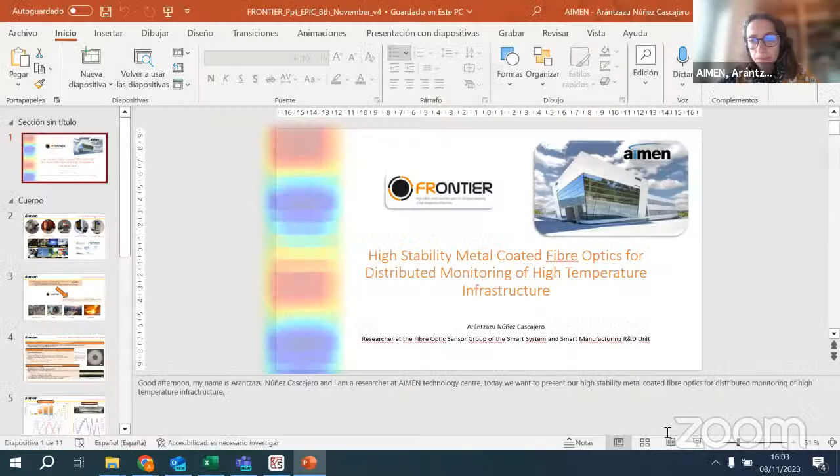I hope now you can see my screen. Yes, okay. Good afternoon. My name is Arántzazu Nuñez Cascajero, and I'm a researcher at the AIMEN Technology Center. Today we want to present our high-stability metal-coated optical fiber optics for distributed monitoring of high-temperature infrastructure.

AIMEN is a private non-profit technology center located in Galicia, in the northwest of Spain. We are specialized in materials and advanced manufacturing processes, working in technological services, offering solutions to clients, and also in research and development projects for different sectors such as metal, mechanics, automotive, aerospace, energy, shipbuilding, and also biofood and textile. Our organization is a member of different European and national associations, and in the last 10 years we have participated in more than 690 research and development projects.

In particular, the solution presented today has been developed by the Fiber Optic Sensor Group of the Smart System and Smart Manufacturing Research and Development Unit. But why does this technology arise?

Because there are many applications where it is necessary to measure strain and temperature simultaneously. For this, fiber optic sensors are a well-known and established technology. Although the fiber optic is made with silica that withstands temperatures up to 1,200 degrees, commercially available fiber optic sensors can only be used for long-term monitoring at temperatures lower than 450 degrees due to the coatings that are used. Also, in harsh environments, their durability decreases drastically.

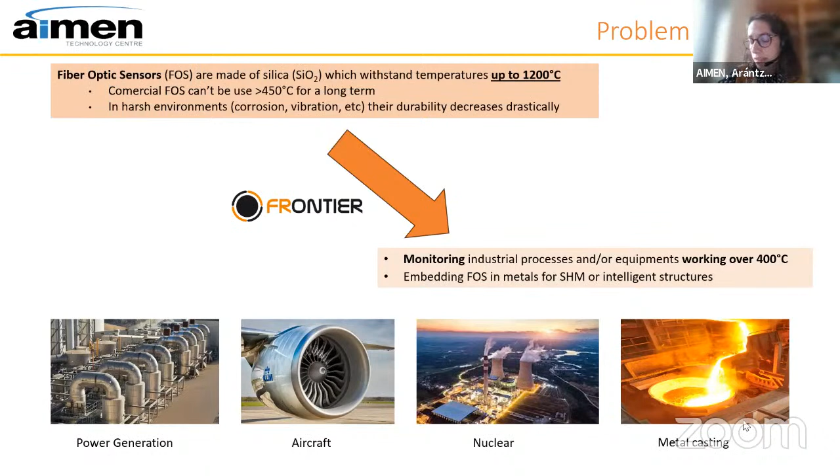So a solution should be found for industrial processes that work at those high temperatures, and also for sensors that don't need to withstand those temperatures themselves, but for which the embedding process requires withstanding very high temperatures due to the melting of the materials. This technology can be used in power generation, aircrafts, nuclear, and also in furnace and pipes of metal casting applications.

Our technology comprises a unique automated and continuous coating system for FBGs and distributed fiber optic sensors. It is a unique technology in the market that is patent pending. The equipment allows the continuous coating of optical fiber with a wide range of coating thicknesses. It has different control and monitoring parameters such as temperature, coating speed, coating quality, and tensile strength, and it's also very versatile because it can be used with other metals when optimized.

As I commented before, it is usable for FBGs and for optical fibers. Regarding the optical fiber that we can achieve and its properties, we can achieve homogeneous custom coatings as the one shown here.

And the fiber that we achieve is very manipulable. They do not easily break or deteriorate.

Also, you can see here other properties. The most interesting ones comprise the thermal performance, having a long-term temperature point of 700 degrees, and for short-term, 1000 degrees. These optical fibers can be embedded by welding, laser, ultrasound, and other techniques. Also, it is important to remark that it is a cost-effective product, being cheaper than other alternatives such as gold or sapphire.

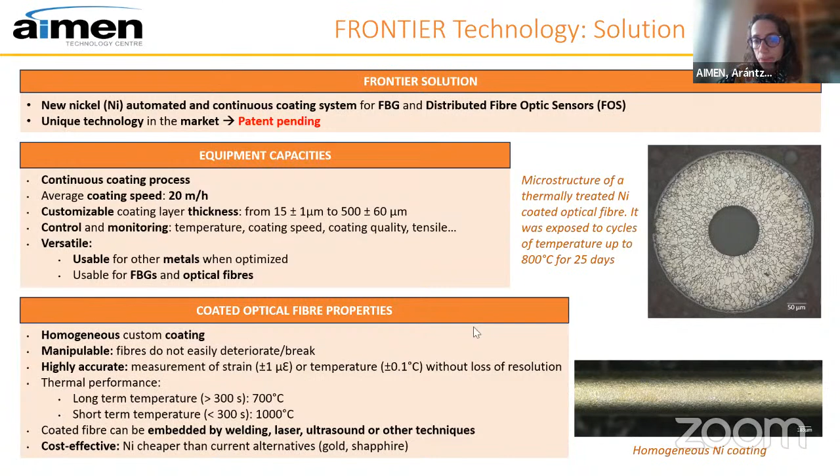The nickel-coated sensors have been thermally tested, and both fibers, distributed fibers and FBGs, show a repeatable and reproducible response in every test that we have done. Regarding the mechanical properties of the embedded sensors, we also have a very reproducible and repeatable response, comparable with those of the strain gauge.

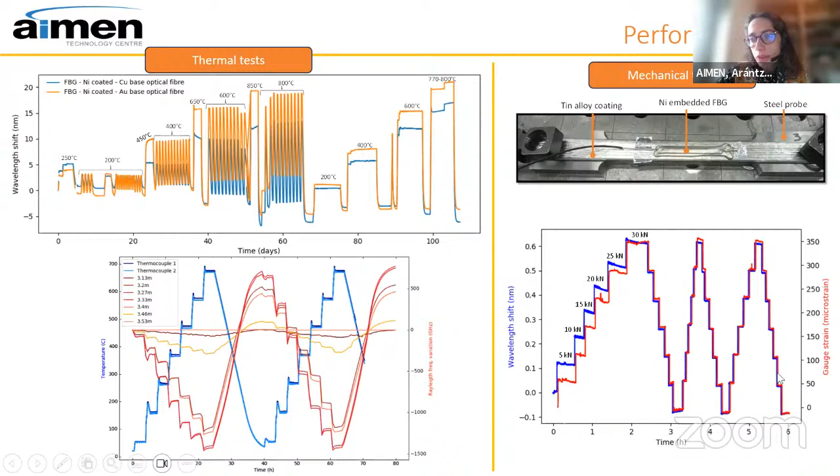Finally, AIMEN has had the opportunity to test these nickel coating sensors in different applications. As fabricated, they have been tested in power generation, mainly for measuring temperature and strain in an energy storage concrete tank of a concentrated solar power plant. Also, they have been installed in a superheated biomass boiler and in a superheated combined cycle boiler for monitoring its temperature during one year of operation.

Regarding the embedded process, we have tested them in a multi-material offshore wind tower, where we embed the metallic optical fiber sensors to monitor the corrosion of the material, and also in the naval sector, where we embed the sensors to monitor the anti-friction material of a bearing. But as aforementioned, this technology can also be used for aerospace, railway, nuclear, and even for metallurgy.

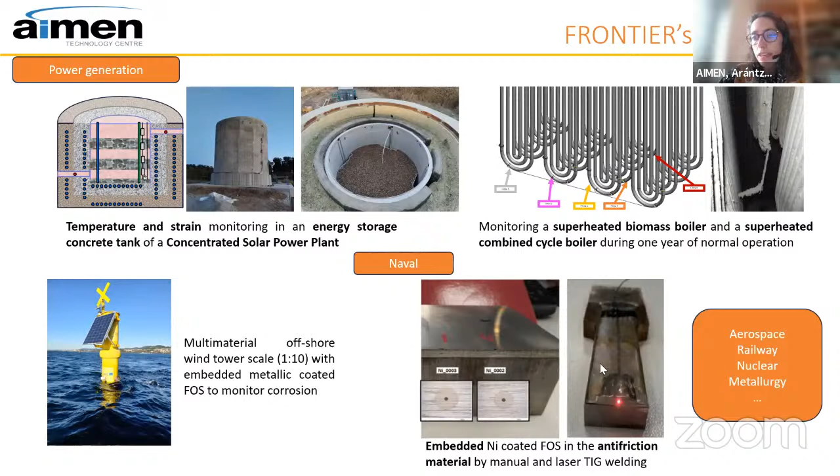Regarding the commercialization of FRONTIER technology, although the patent is pending, it will cover the fiber coating process and the implementing equipment, with particular focus on the monitoring and quality process of homogeneous custom coating. AIMEN is actually looking for licensing the technology, but small orders can be contracted for tests and pilots. We think this technology may be interesting for special fiber optic manufacturers and also for optical fiber sensor manufacturers, which are interested in harsh environments.

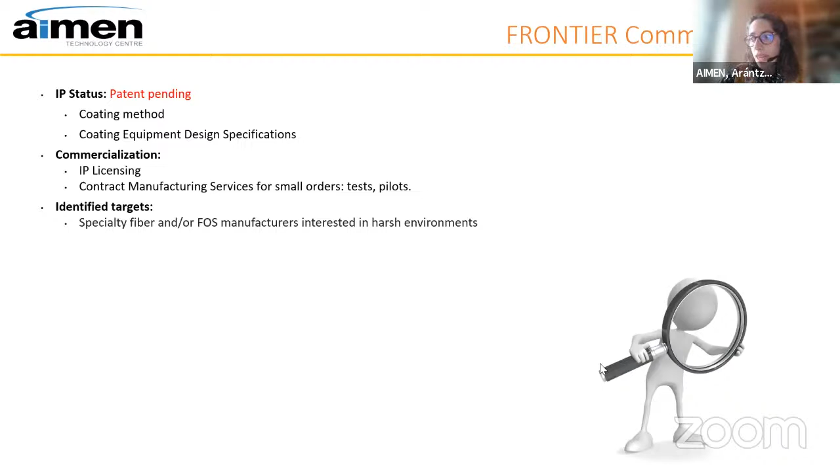So, if someone is interested, please do not hesitate to contact us. Thank you for your attention.

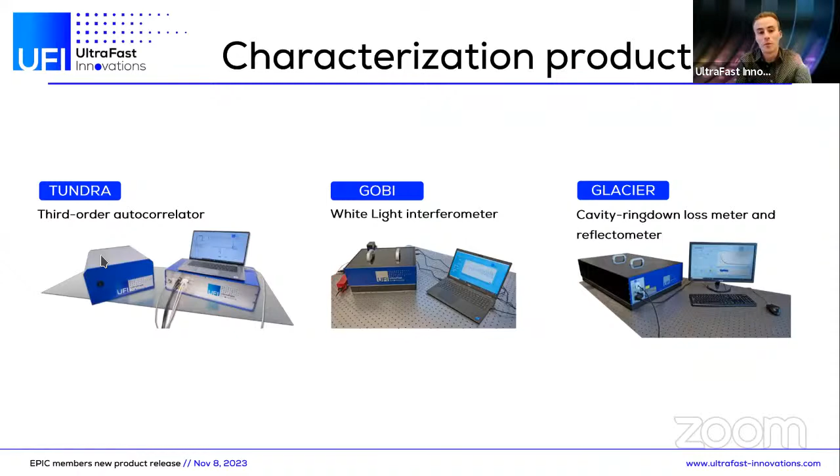Just to give you a quick overview of the products we offer, we have our characterization product line with a third-order autocorrelator, white light interferometer, and cavity ring-down loss meter and reflectometer. Especially the Tundra is widely used in laser facilities to measure the pulse contrast. Besides these products, we also offer a bunch of other products important to scientists in attosecond physics or in ultrafast physics.

Just to name a few, for instance, the K2 delay unit, which can be used as the generator of some pump probe measurements, or the light field synthesizer Capella, which is a rather tiny device, but it's doing some very interesting pulse shaping by splitting ultrafast laser pulses into different channels, compressing each channel, and then recombining those channels again.

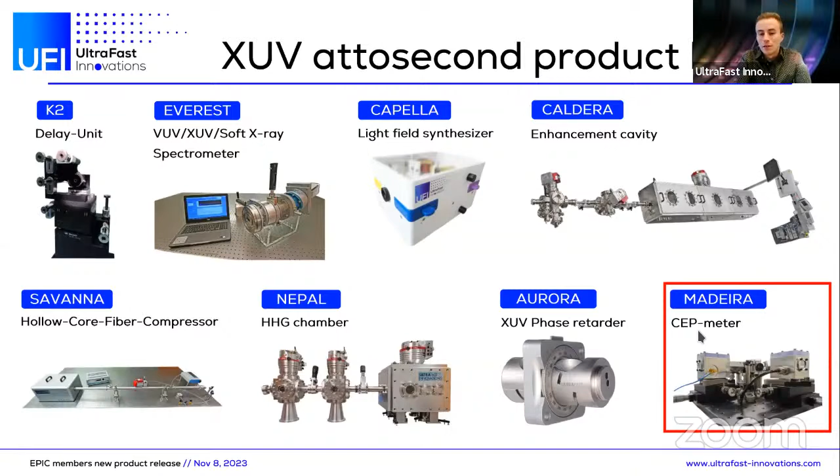But today I'm going to talk to you about the Madeira, which is a CEP meter. And when I talk about CEP or carrier envelope phase, you might not be all familiar with this because this is a quantity which is

Because whenever you are dealing with some kind of light matter interaction, the electric charges that you manipulate always couple with the electric field of light. And this single quantity describes the shape of the electric field of light. And therefore, in this few cycle regime, you can describe the whole experiment as a function of this carrier envelope phase. And this is why this quantity is very important to scientists in this field.

And our CEP meter can now measure this quantity, but not in a way that it needs a long acquisition time, but rather in a single shot way, which means that you send one isolated pulse to the device and it tells you the CEP.

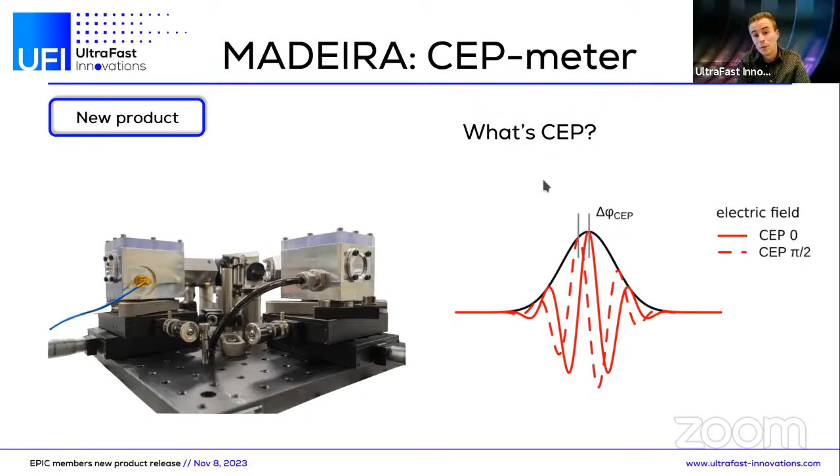But also for diagnostics of laser systems, it's important that you can actually verify that the carrier envelope phase of a system that is supposed to be carrier envelope phase stable is stable on a single shot basis.

And our product is especially designed to fit to this titanium sapphire based laser systems, which usually have a wavelength or operate in a wavelength range from 500 to 1000 nanometers. And this is where our device works best.

And when using this device, it's actually, in addition to a reference, you can actually verify that the measurement data of this device corresponds to the carrier envelope phase. And it's coming with the advantage that our device is sort of a one-to-one replacement to other commercially available devices, but with a much simpler approach, because previously the use of ultra-high vacuum was necessary and some MCPs. But our device is now measuring a similar or the same quantity with a much simpler approach, which makes it much more reliable in comparison to what has been on the market before.

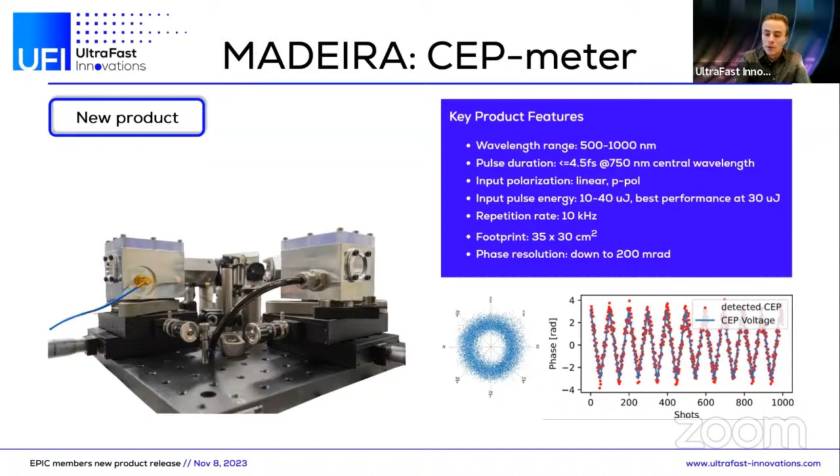And with this, I would like to conclude and thank you for your attention. If you have any questions, please feel free to ask them right now or contact us under

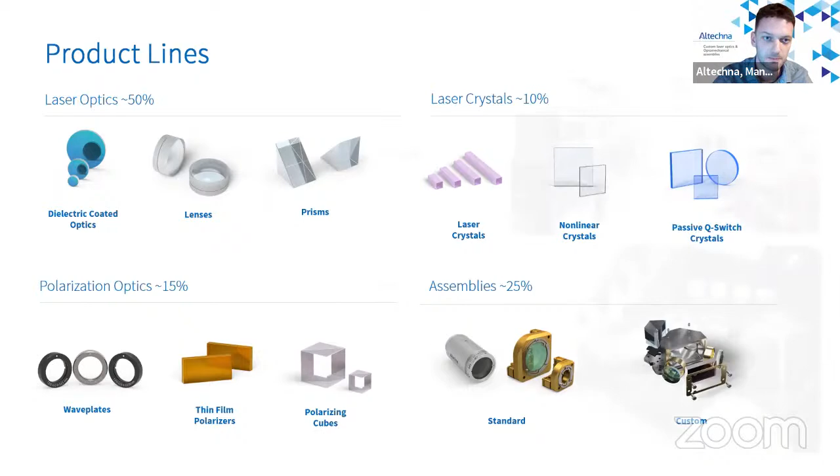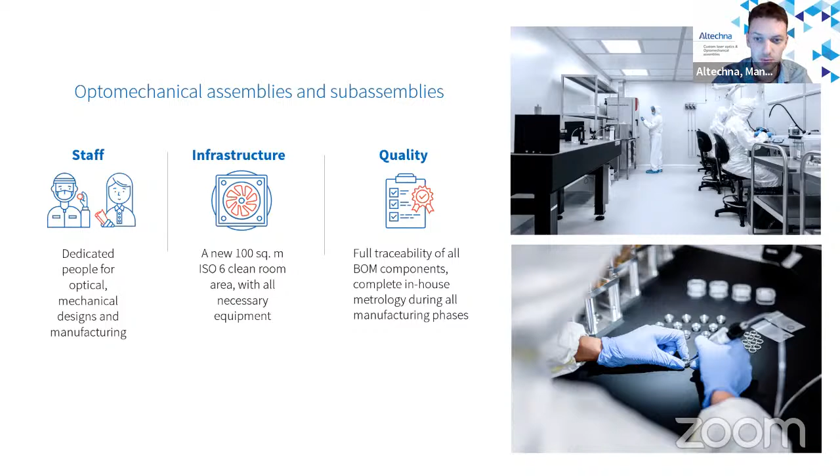These are typically build-to-print projects, or what other people call contract manufacturing. Our in-house optical and mechanical engineers help each of our customers build the products they need, but we can also manufacture already designed products. These can be various optical components bonded together with other optical components and then mounted into various mechanical housings. High cleanliness requirements are not an issue, as we have a brand new clean room area equipped with required metrology devices for full quality control. Assemblies can be measured and packed in a clean room without exposing them to an unclean environment.

Now let's proceed to the coating technologies themselves and my today's topic. There are three main physical vapor deposition methods used commercially in the market: ion-assisted electron beam deposition, ion beam sputtering, and magnetron sputtering. We have all of these main technologies in-house at Altechna, which makes us really flexible when we need to offer the most suitable coating solution for the customer.

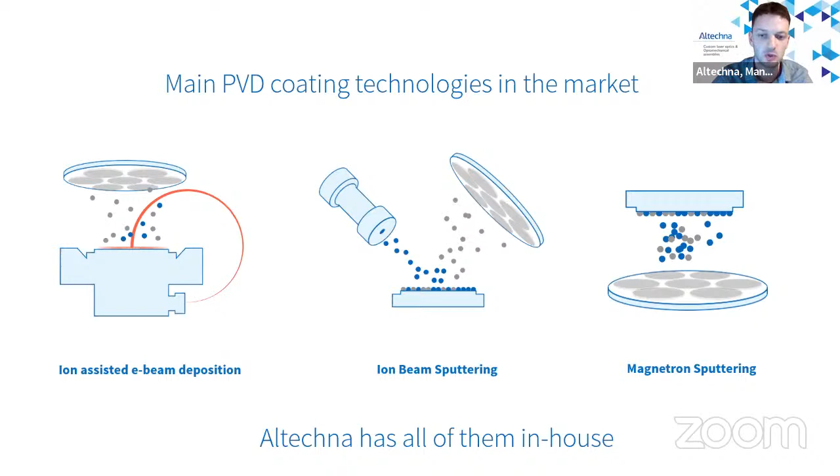How is the subsurface formed? Once the bulk of the glass or crystalline material is cut and ground, it finally has to be polished. The most common polishing technique is pitch polishing, which is also the most cost-effective one. The pitch, together with slurry, is pushed towards the substrate by rotational movements. So, a simple polishing technique.

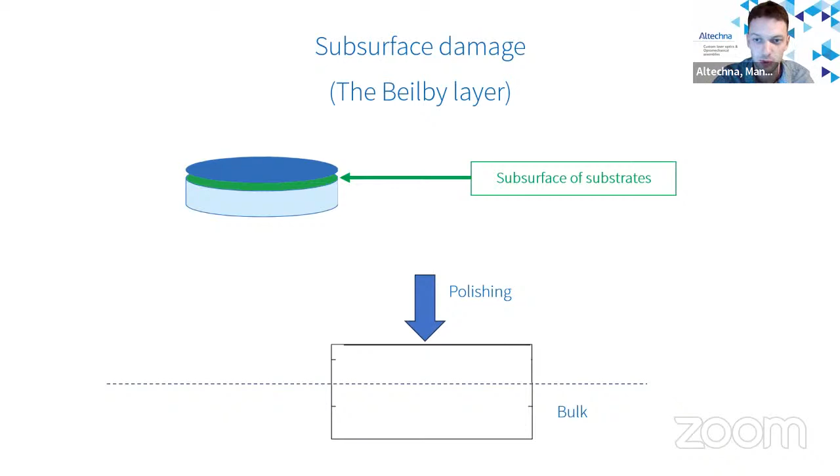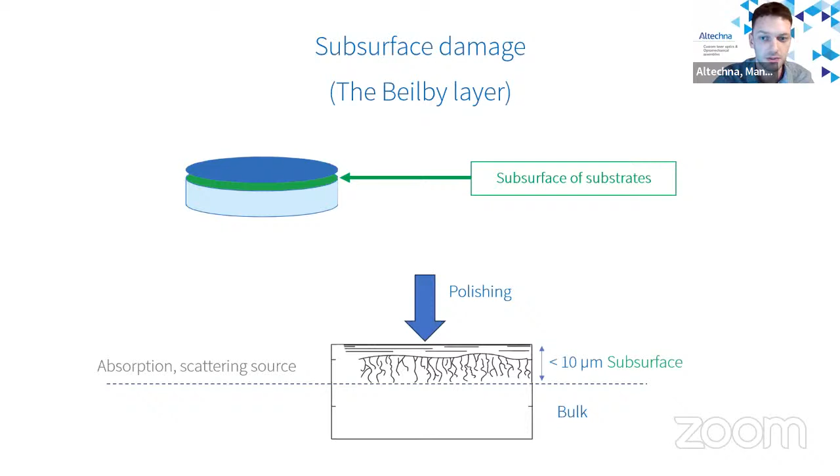This force towards the bulk creates small cracks, which are filled with polishing slurry. Even after repeated cleaning of the substrate, these contaminants remain in the cracks. All these cracks and residual material form the so-called Beilby layer, which acts as an absorption and scattering source, leading to a limited damage threshold. Depending on the polishing quality, the thickness of this layer can be up to 10 microns, so it's really relative depending on the polishing quality.

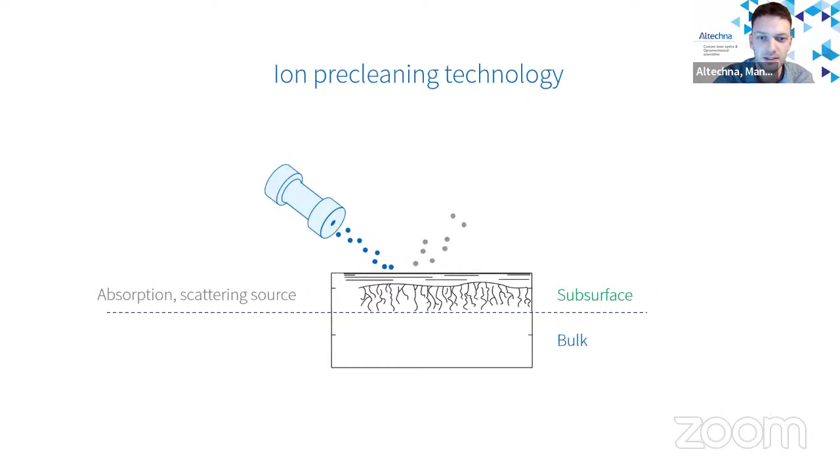To overcome this issue, our engineers have developed an ion pre-cleaning technique. I will not go into great detail due to time limitations, but simply put: first, substrates are loaded into a coating chamber. Then a strong ion beam is shot towards the surface of the substrate, and a big portion of the surface contamination I described in my previous slide is removed. Afterwards, the coating is deposited without opening the chamber, forming the optical properties and also sealing the surface.

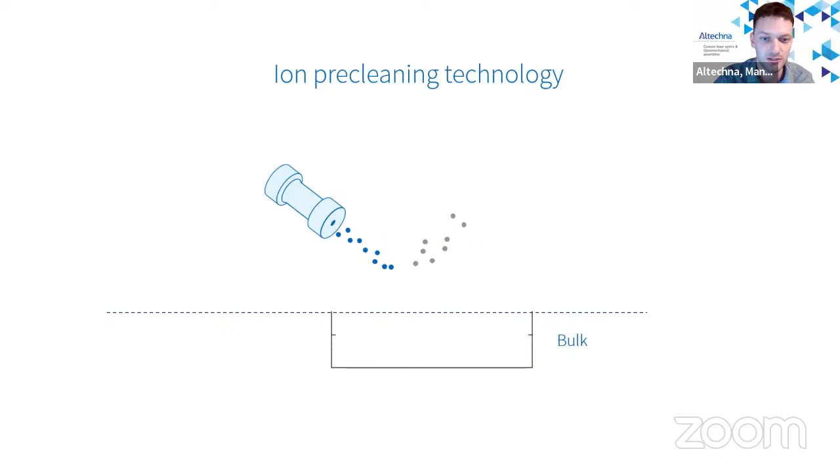Even though it sounds like an easy job, in real life there are many factors and parameters influencing the outcome of this process, so it's really not that straightforward. After many trials and failures, we were able to achieve great results for transmissive optics. I will present just two examples.

The first one is a window coated with anti-reflective coating. Without ion pre-cleaning, typical LIDT values are somewhere around 25 joules per centimeter square. Meanwhile, with pre-cleaning technology, we repeatedly managed to achieve more than 67 joules per centimeter square. Damage threshold tests were done at 1064 nanometers, so the increase was more than 2 times. Absorption was not influenced for this window and remained below 1 ppm, same as without pre-cleaning technology. So these strong ion sources do not induce any additional absorption.

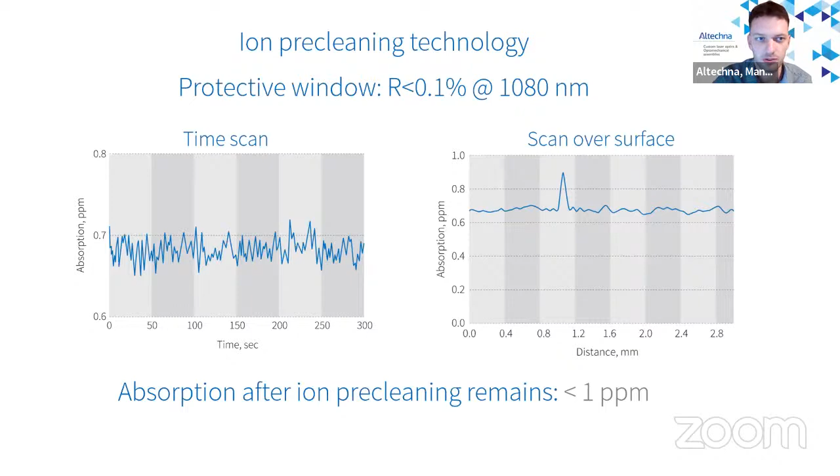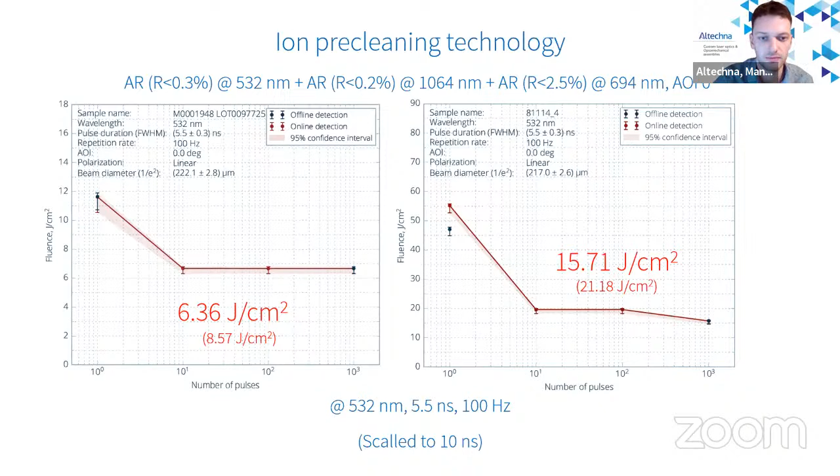The second example is a multi-wavelength AR-coated optical component. Without pre-cleaning, typically achieved value was 8.5 joules per centimeter square. When we scale the result to 10 nanoseconds pulse duration, because tests were executed at 5.5 nanoseconds, we can rescale it to 10 nanoseconds, what is typically used in the market. Once we did pre-cleaning, we managed to achieve more than 21 joules per centimeter square, also scaled to 10 nanoseconds. These measurements were done at 532 nanometers. So these are just two very short examples of what we're able to achieve.

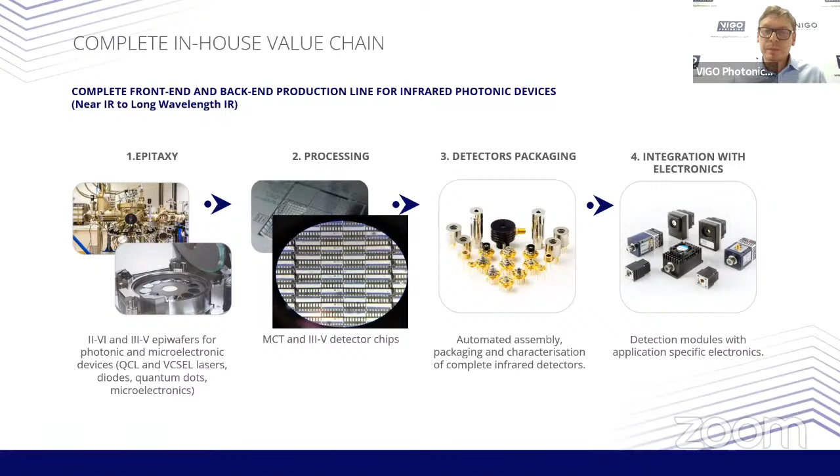Compared to other IR sensors, it can also work with wavelengths smaller than 2 micrometers. Most of our sensors for longer wavelength cannot see any wavelength lower than 2 micrometers. The area, this kind of starting point for us, is 1 micrometer, 1 square millimeter. But we can do them smaller, we can do them slightly bigger. It's up to the application.

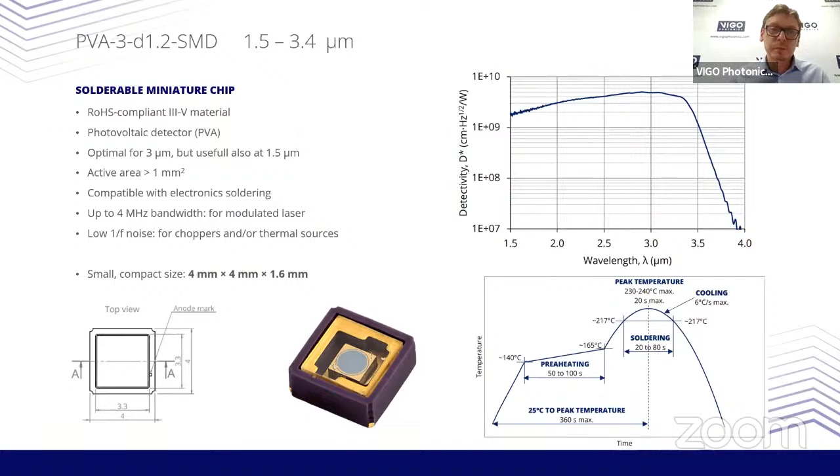low frequencies, because 1/f noise is not generated by the current flow through the sensor. The sensor is not biased, and the only source of the 1/f noise is related to the preamplifier. We've made it also a single supply, so it should be very comfortable to work with for the engineers designing the electronics for products.

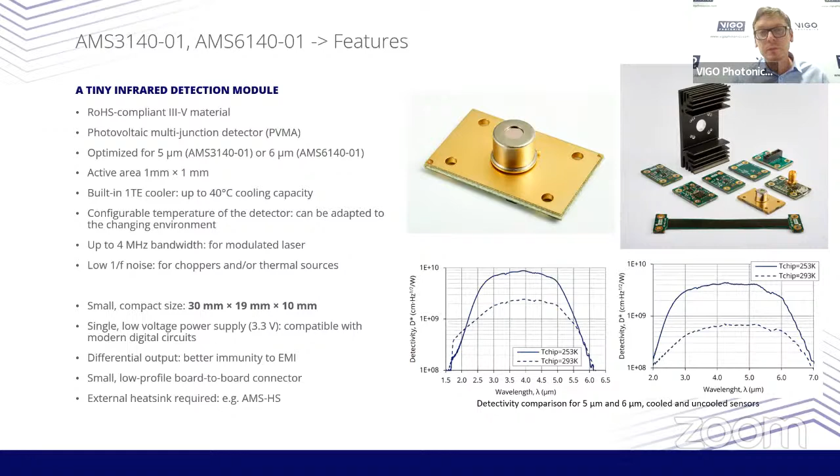And because we tried to make it as comfortable as possible for R&D development, we also introduced a group of accessories that can be easily connected with the module. I will mention only a few. You will get that presentation later, but quite useful is the additional amplifier that can be just stuck on the preamplifier, and this way a gain of 10 times is generated.

We have them in two versions, one AC coupled and one DC coupled. So any gain can be achieved using multiple amplifiers stacked one on another. A few mechanical accessories and a digital accessory.

Digital is an analog to digital converter with interface. It can be a USB interface or SPI interface. It is also just stacked on top of the preamplifier, and we get a full signal in the digital domain, keeping the frequency of 4 megahertz still available.

This is how it looks when it's stacked all together. This is the heatsink that we can deliver, preamp on the bottom, a few additional amplifiers in series, and a simple connector for analog analysis using an oscilloscope.

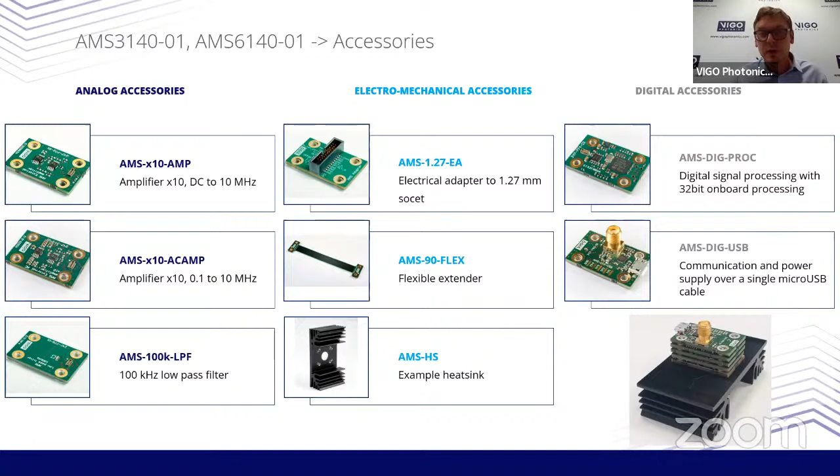And third, actually, the product that I wanted to mention is a cascade detector. It's a type 2 superlattice based sensor optimized for spectroscopy at long wavelength. We have two versions, one up to 11 micrometers and a second one up to 14 micrometers. The 11 micrometers, 10.6 actually, is also available as an uncooled version.

Thank you. If you have any questions, I'm open and happy to answer.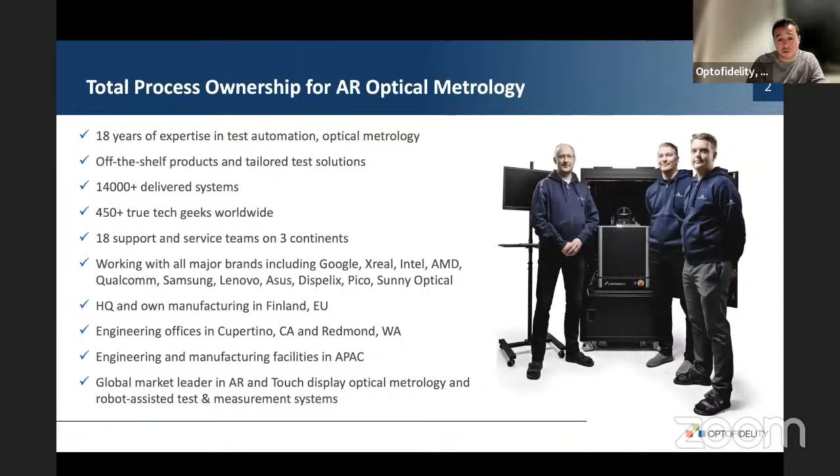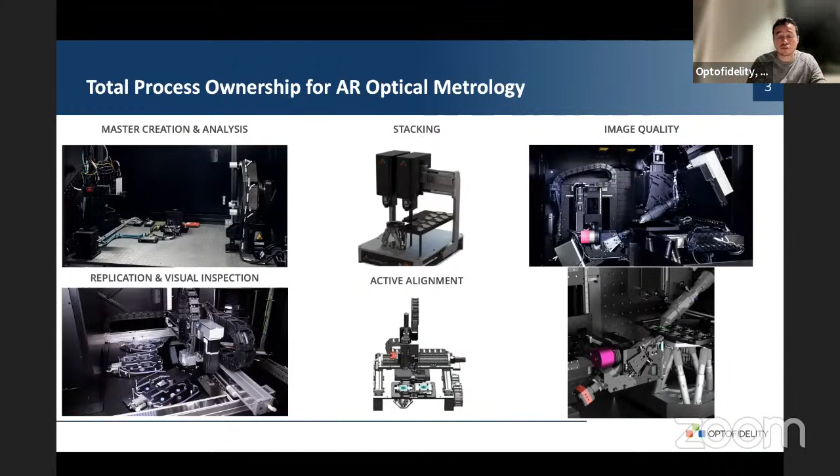Let's jump on the next one. As mentioned, we want to be a one-stop shop for our customers' testing and metrology needs when they are developing and manufacturing this type of eyewear. Here are some relevant solutions, from grating analysis to assembly of the waveguides, and today's focus will be image quality. That will be the focus of this presentation. So let's start by asking a simple question.

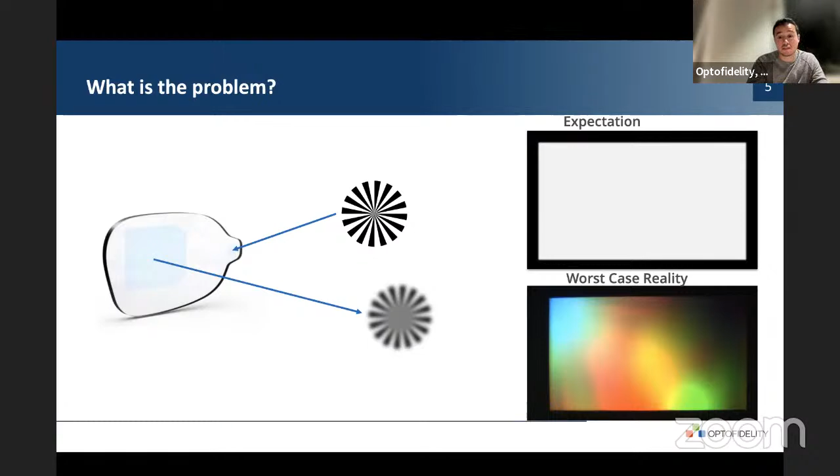The answer to that question will reveal the purpose of our product. On the right side, you can see what is projected into an AR waveguide and the resulting virtual image that appears to the user. On the left side, you can see what is given from the input grating and what is taken out from the output grating. So the question is, does this waveguide produce a nice image? If so, how nice is it? Can you measure it? Can you quantify it? This has been the main challenge faced by pretty much all companies working on developing AR smart glasses or any type of virtual reality head-mounted displays.

Before designing such an optical metrology system for near-to-eye displays and their components, in this case the waveguide or waveguide combiner, one needs to study the human eye very well, because simulating the human visual system requires knowledge of the human eye and its performance data, such as field of view (FOV), resolution, angular resolution, sharpness, contrast, and also mechanical data such as IPD, eye relief, eye pupil size, etc.

With that challenge in mind, our optical metrology team designed a lens that replicates large FOVs, with the entrance pupil in front of the surface and with variable focus. We can also change the aperture to simulate different human pupil size variations, just like the human eye would do in any type of situation. Then we can attach a monochromatic camera or a colorimeter to this lens, and with the combination of this lens and a suitable camera, this tool now sees what the AR smart glasses user would see.

It's a double imaging conoscopic lens having two aperture stops, one external for the camera and one internal for the projector, so we can use it for both projecting something and then imaging something out from the output grating. By adding a camera, we turn this combination into a machine vision solution. Now we can have single shot imaging of the full field of AR waveguides, just like you would wear the glasses and see everything with your own eye. With that kind of imaging data, it is now possible to really tell if that waveguide produces a nice image or not.

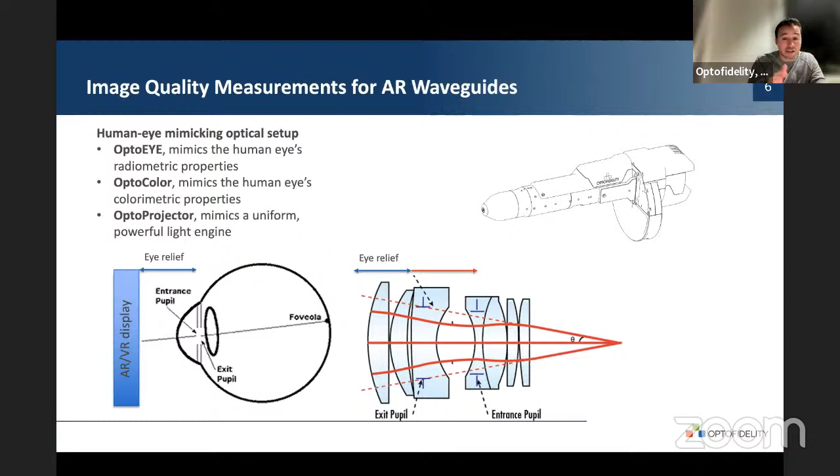Let's jump to the next one. Of course, as a component, the lens and camera alone are not good enough, because the human eye moves around, so you also have to develop a very accurate robotic platform. So we designed such a highly accurate robotic platform, which supports an extensive range of pantoscopic tilts, in this case up to 12 degrees already, and a certain degree of face wrap angles. It's multi-axis, allowing us to perform both world-side and eye-side measurements.

It's flexible, and we can accommodate, for example, eyepieces, also called waveguides, diced waveguides, or full size wafers up to 300 millimeters. With its various positioning cameras, shown here in the diagram, and also sensors, autocollimators, active alignment tools, and even a hexapod, these all support its excellent accuracy.

So once this optical setup and the robotics are integrated, we made this AR optical metrology system. It is going to be mainly used for R&D, but it's going to be so flexible, and it's also going to be providing a good enough speed so that it will be enough for even ramp-up phase needs.

of the image quality testing. So with this new system, our customers now can measure various test metrics. It's click and run, and they can also implement their own algorithms for whatever the test case they are working on. They can also measure that because the hardware is there and the software is also allowing that.

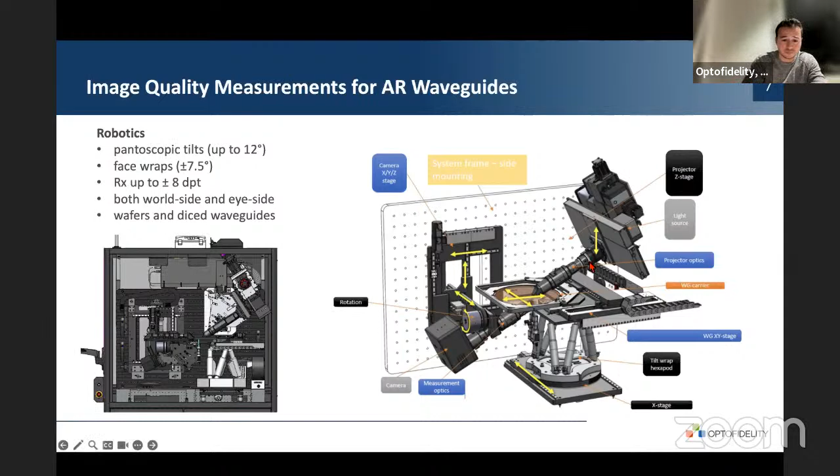So these are the click and run test metrics, included in its software suite: checkerboard contrast, color uniformity, chief ray angle, MTF, efficiency, eyebox, FOV, geometric distortion, luminance. These are the most relevant ones when you are testing something in terms of its image quality performance.

So some pictures here, these are real pictures from a real commercial product, commercial head-mounted display. This is what you get, and this is how you decide if your waveguide actually produces a nice image or not. So with this product, now it is possible to measure that.

And it will cut down your design iteration tremendously, and it will also cut down all of your production costs, all the test costs, because now you have a tool that will immediately tell you: okay, we've done all of this design, now we have our gratings ready, we have our waveguide stack ready, let's just put it here, let's just measure it. And it will tell us whether this gives a good image and how good it is, because it will also provide you all the raw data basically.

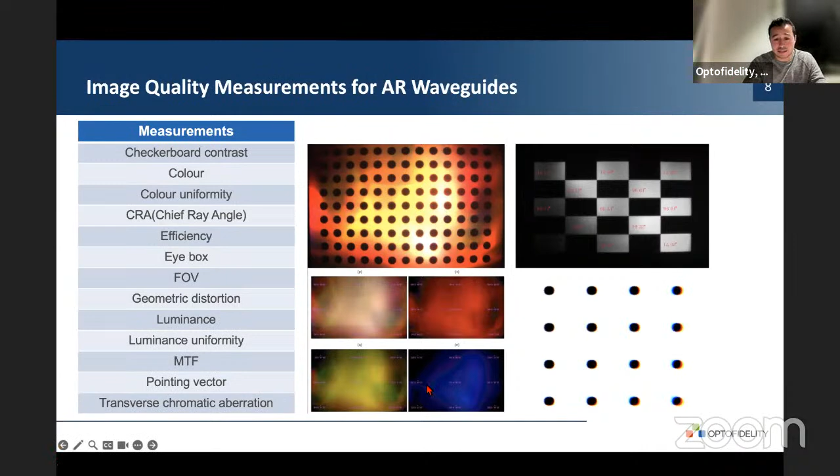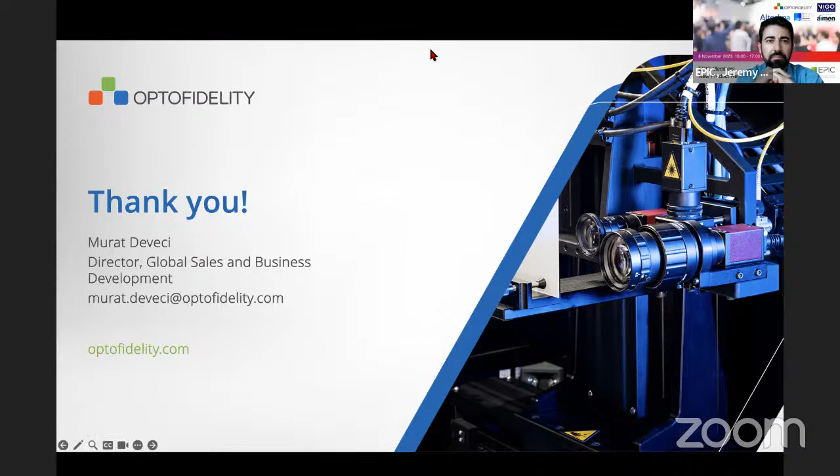So this product, Murat, is dedicated to measure components, but are you able also to do this kind of measurement on the global system? Like the headset, directly on the headset or directly on the eye?

Yeah, so for the fully assembled headsets, if you are referring to that, the same lens, same colorimeter, and different cameras can be used. But for this particular product, it's for component level testing. So before you actually assemble the whole thing, first you have to decide that this waveguide is good or not, so that you move on to the next phases.

So your targeting customers could be system integrators or waveguide manufacturers, for example. So all the brand owners, when I say brand owners, companies that have their own head-mounted display markets, or waveguide design houses who own the design IP for the waveguides, or integrators. They are actually manufacturing for the brand owners, and they need to have the tools to measure the waveguides during the assembly phases.